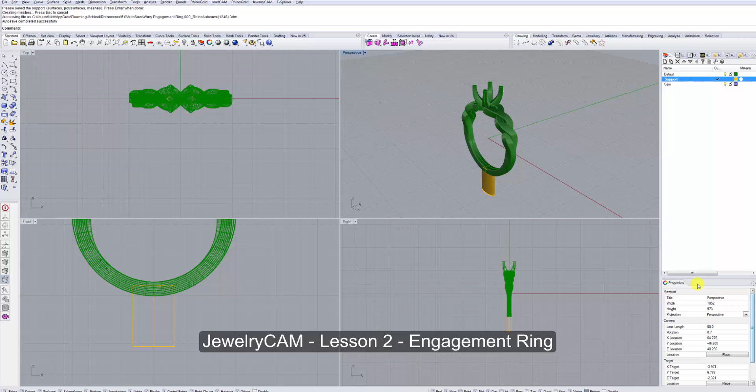In this lesson we will talk about another automated mode in JewelryCAM called engagement ring. This functionality is aimed at producing rings that are not entirely radially symmetric, but rather have one side that holds stones, one or many, and another that's just a straightforward shank. Something along these lines, what you see here. It could be more complex than this, with further prongs and perhaps stones on the side, but it gives you an idea of what is meant by an engagement ring.

Here the ring is marked in green, and the support that we will be adding to it is marked in yellow. So this is how the original model looked, and this is the support that we've added. Support is the part that will be left as well as a part of the cutting. That's what's going to hold our finished ring to the wax stock.

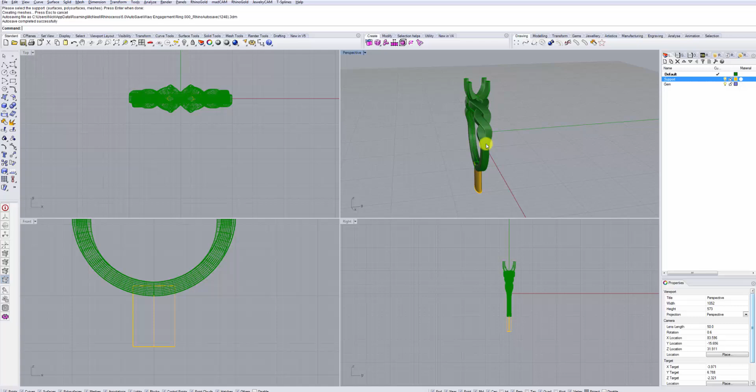If you watched the previous lesson, you'll remember that we were able to cut a band ring by eventually just cutting off both sides. Here we're not really able to do that, so we need to leave some area which will be holding this ring. And ultimately we could even use this section as a sprue when casting.

So to begin, we load our model, we make sure our support is ready. This is important if we are planning to have more than one support. For example, if we want to sprue to the sides or to the inside, we have to make sure that they're included in the initial scene. We cannot add them afterwards. So everything that you plan to mill should be assembled in the scene right before you begin.

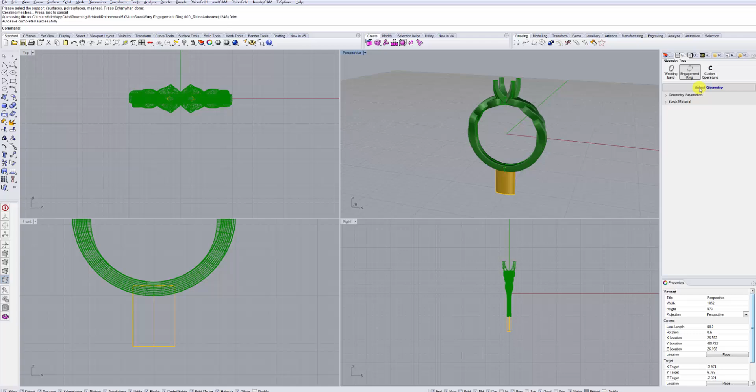Then we switch to the engagement ring mode. Click select geometry. Select our ring geometry first. Press enter. Select our support. Press enter. And here we have to wait a little bit while the program calculates our necessary stock.

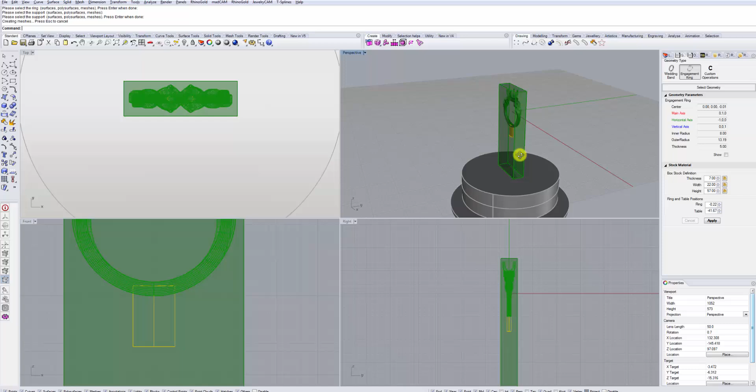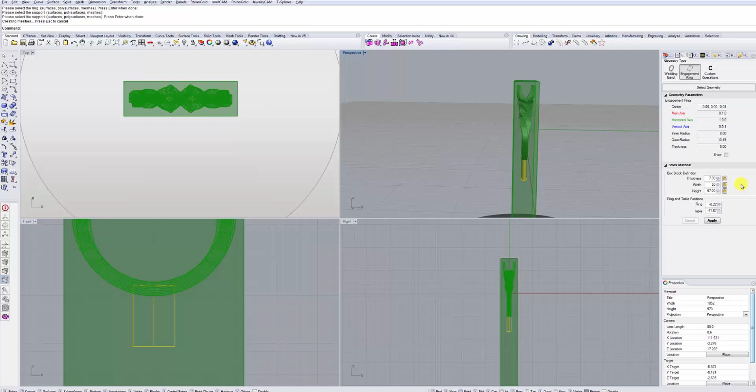As before, we see a little preview of our wax stock as well as the holder. Once again, it's very important that we define the stock to be of the exact thickness, or very close to the exact thickness, of the actual wax block that we're using. So let's say if our width is actually 30 millimeters, we have to make sure we define it as such, and we click apply.

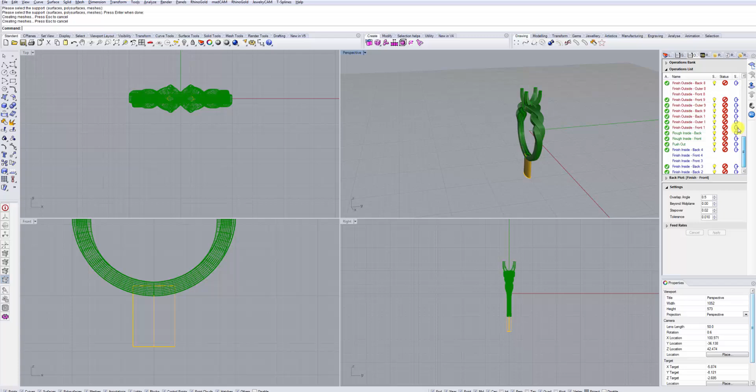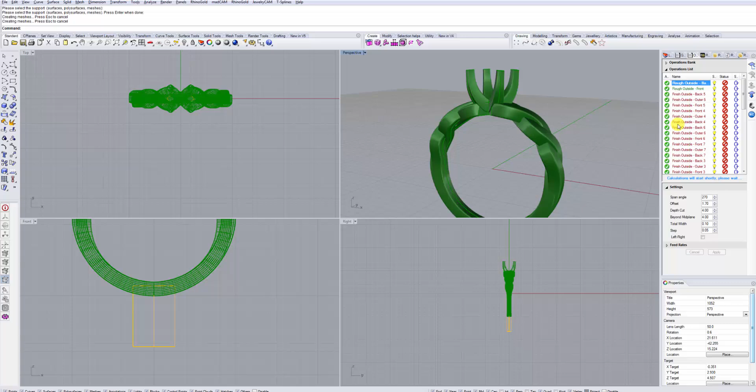This will begin the setup of all of our operations. They will not be calculated right away as before. You'll see that there's a whole bunch of them, and we can either calculate them one by one, or we can use our shortcut calculate all, alternatively pressing Ctrl F5. This is going to take some time, so for the time being I'm going to pause this video and come back when it's finished.

And here we see our finished calculations overlapping the model. So let's see what JewelryCAM calculated for us. We begin with a rough outside cut from front and back, which cuts out our general shape of the ring from the wax block. If we specified our wax block stock thickness correctly, this should trim it right down, discarding the outsides. Then we begin the final operations on the model itself, starting with the part furthest away from the holder and slowly moving our way towards the holder itself. This way we maintain the most control of our model.

As you can see, these cuts slowly move from our prongs all the way down to our base. We have a few rough cuts for the inside of the ring, and the program is smart enough not to do these early on because we actually need this for support. This helps us to maintain the ring integrity as we're cutting these pieces.

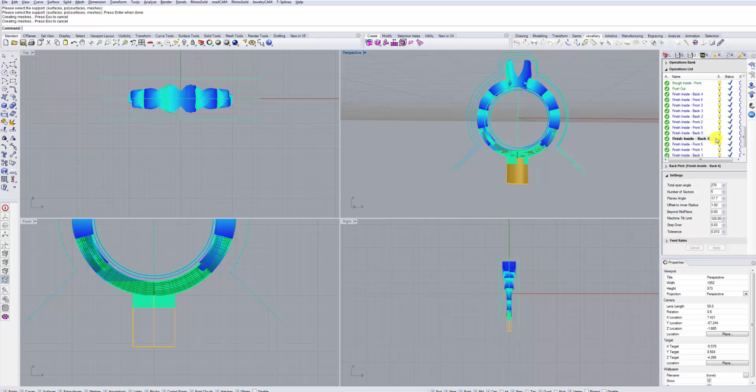Now that they've been cut, they're moved out, pushed out, and we proceed with cutting off the rest of the stuff, finally finishing with the area touching the support. Let's see how it looks in our machine simulator.

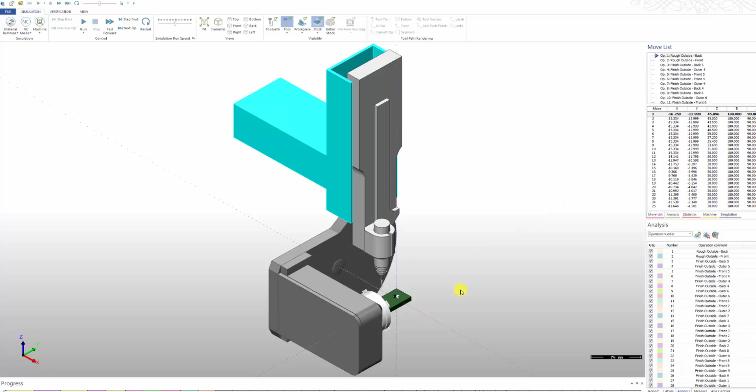Here's our machine simulator showing our wax stock and all of our operations. Let's once again make the stock transparent and the workpiece visible. So there we can see our ring model encapsulated by the stock, and let's see the simulation.

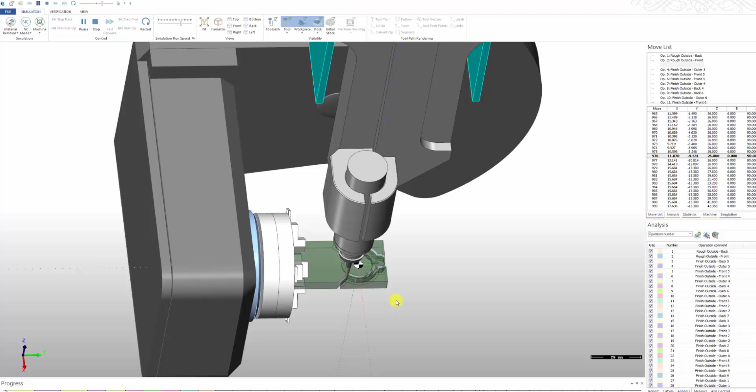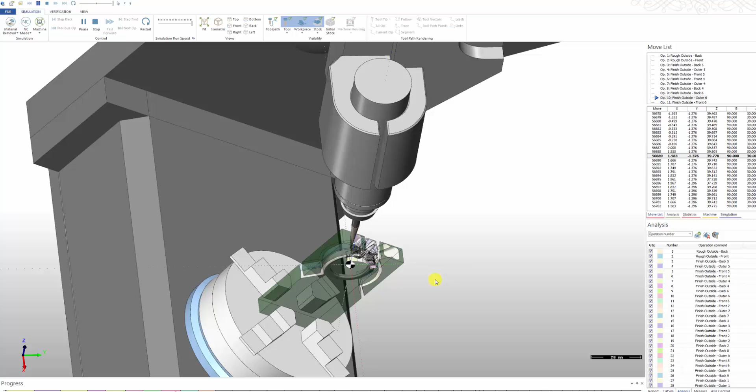Let's speed it up a little bit. So there's our initial cut from the outside, discarding the extra wax, and we begin work on the actual model, cutting away material from the top and moving slowly towards the bottom of the ring, but before reaching the bottom, doing the inside operation.

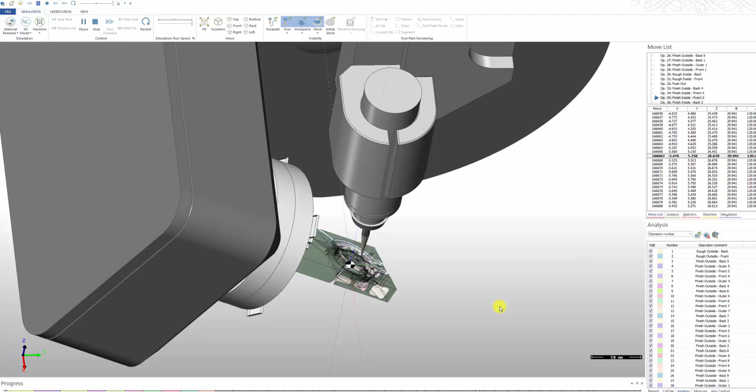So here you can see the inside of the ring being cut out, as well as the undercuts being processed, and finally the last parts.

While we're in the simulator window, we can have a look at the operation statistics and determine how long the entire process might take. If we look a little bit down low, here's the total machining time—it's estimating it to be around 2 hours and 55 minutes.

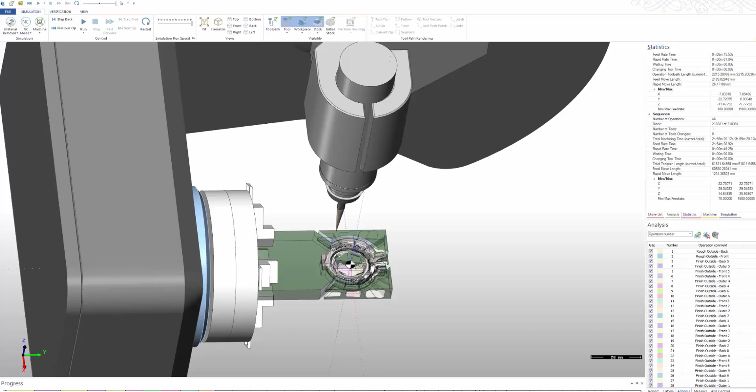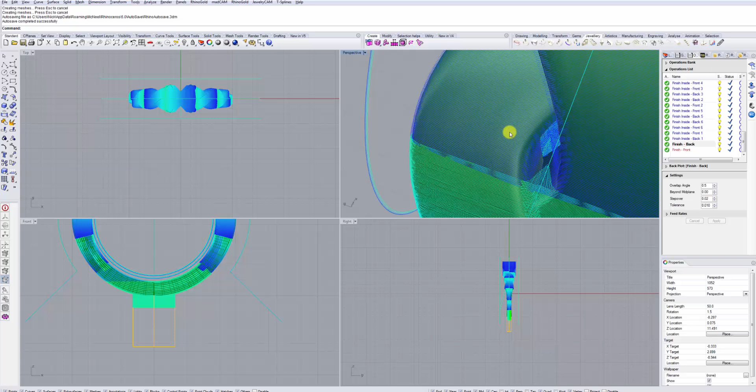As you're probably familiar, the speed of milling as well as speed of calculation very much depends on the resolution of your cutting. In this case we're using 0.02, so 20 microns resolution, very fine. Even though it's going to take a fairly long time, the result is going to be a very smooth wax surface that will cast really nice and clean, and will require minimal finishing once it's been cast.

And there you have it, a fairly complex ring being cut out entirely in an automated fashion with only a few clicks of a button.

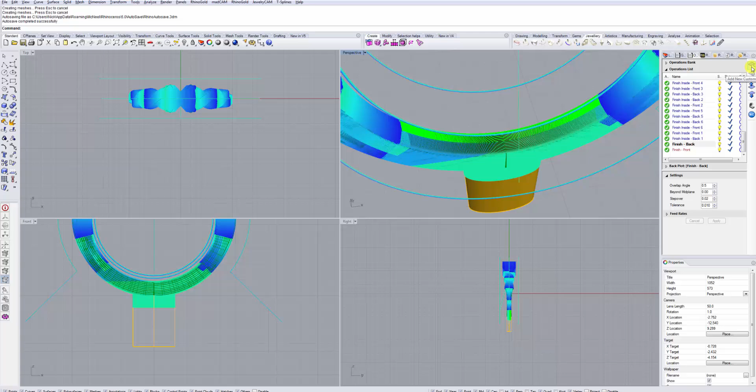Now, if you want to add further layers, or by layers I mean further operations, for example if you want to add some sort of special processing in this area, you could do so by adding custom operations. But for the time being, this completely hands-off process will yield you a working model that is done in a basically fully automated way.